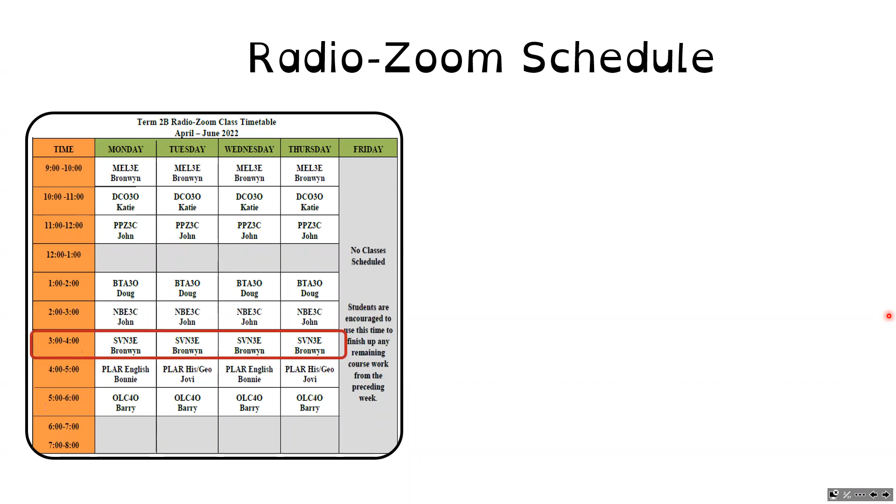Our classes are scheduled Monday through Thursday from 3 till 4 in the afternoon, and we are now in our 7th week of our 9-week course. At this point, you should definitely be submitting work if you haven't already, as we only have 3 more weeks left of our class, and then everything needs to be done before that so you can do your culminating activity.

So the key questions are the ones listed at the end of each lesson. Please do all of them. Some are check your understanding questions, some are activities at the end of each chapter, and most are review questions at the end of each chapter. So look at that list and do the appropriate questions.

Please show all of your work, explaining all of your thoughts and your thinking. This way I can truly understand what it is that you understand. Also make sure that you are answering the question that is actually being asked, as opposed to just talking on the topic.

You can do it by hand or electronically. Feel free to write in your workbook if that works for you. I'm not attached - it is a small space, so I would be surprised if you have enough room, but if you're able to fit your ideas in there in a way that is full sentences that explain your thoughts completely and is clear, that is totally fine with me.

You can also type up your work electronically. Using Word or Google Doc files are the ones that are easiest for me to open, so if you use those, that would be great. Everyone has access to Google Docs through their NNEC email address, so I can support you to get access to that if you need it. If you are going to use a different program, I'm sure that it's fine - just touch base with me so that I can make sure I can open your files. We can do a trial version or something.

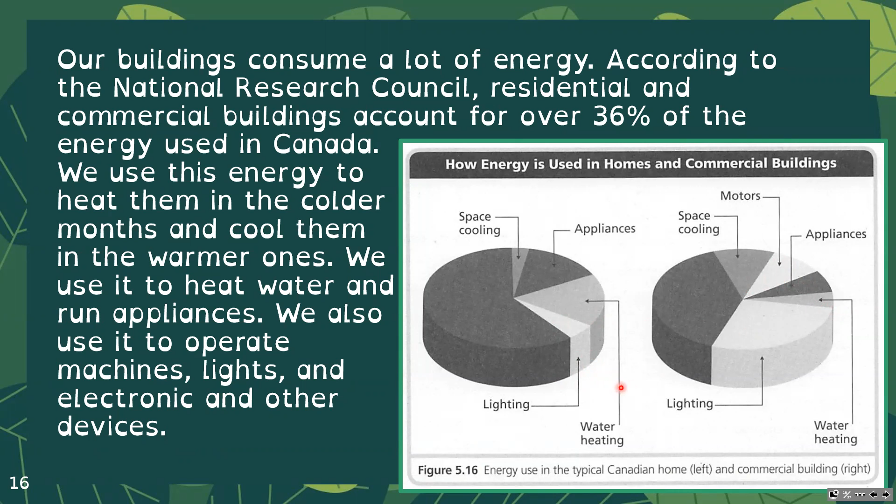The greatest need for energy in residential buildings is for space heating and cooling. On average, about 63% of the energy used in a typical Canadian home goes towards space heating and cooling, and another 18% goes for water heating. In commercial buildings, almost 50% is used for space heating and cooling, and some 36% on average is used for lighting.

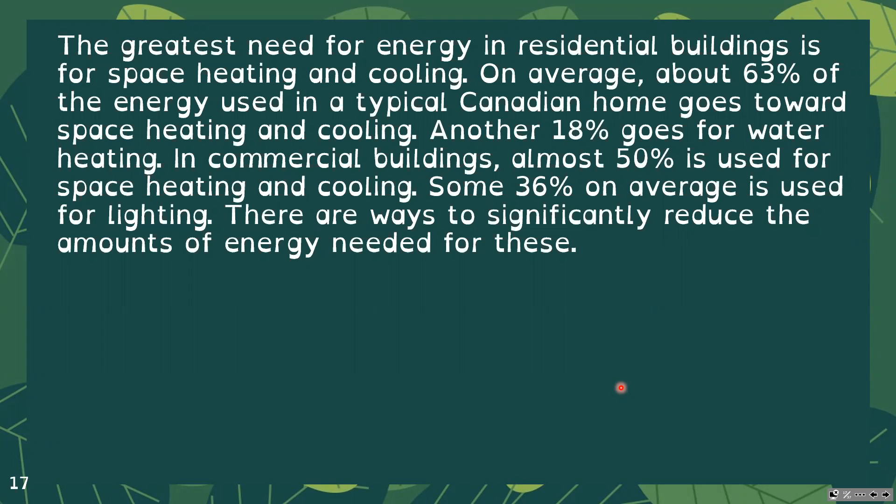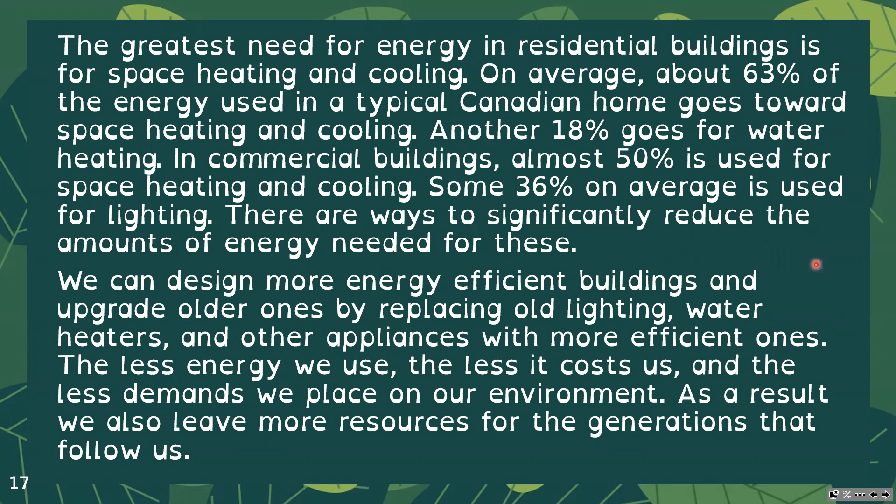There are ways to significantly reduce the energy needed for these. We can design more energy efficient buildings and upgrade older ones by replacing old lighting, water heaters, and other appliances with more energy efficient ones. The less energy we use, the less it costs us, and the less demand we place on our environment. As a result, we also leave more resources for future generations. Even if we're still using energy in these same ratios, doing it more efficiently overall means we're saving more electricity or energy. So how can we design energy efficient buildings?

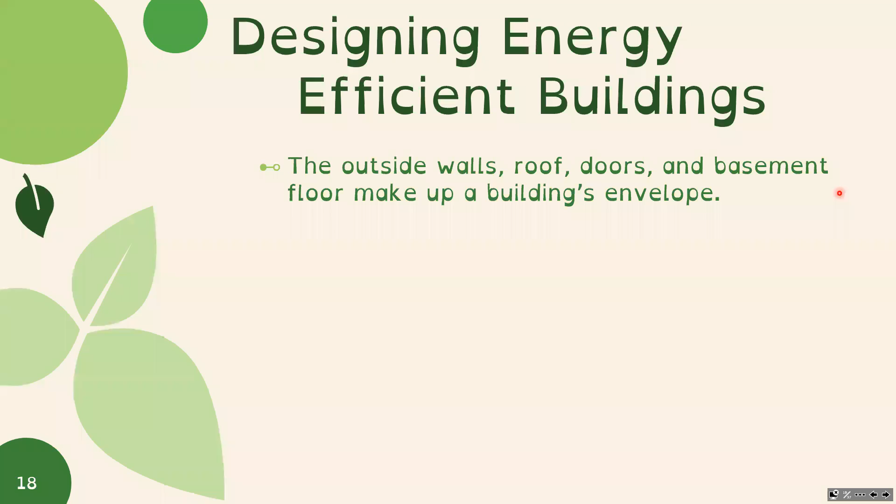The outside walls, roofs, doors, and basement floor make up a building's envelope. It's called this because this surface wraps around everything inside the building. The envelope keeps the building's contents, including people, protected from the weather. It also forms a barrier against heat loss when the furnace is on, and heat gain in summer when the air conditioning is on. If this barrier fails, the energy loss through its parts can be large.

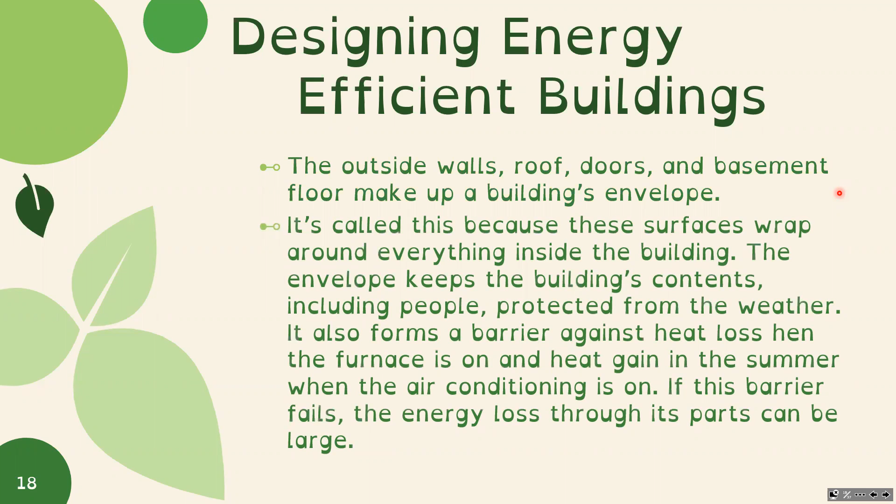This envelope is really, really important. I've definitely lived in homes where it wasn't super sealed, and you could feel the cold air coming in through doors or around windows. That had a really big impact on the well-being of my household, just because the envelope wasn't sealed and wasn't really strong.

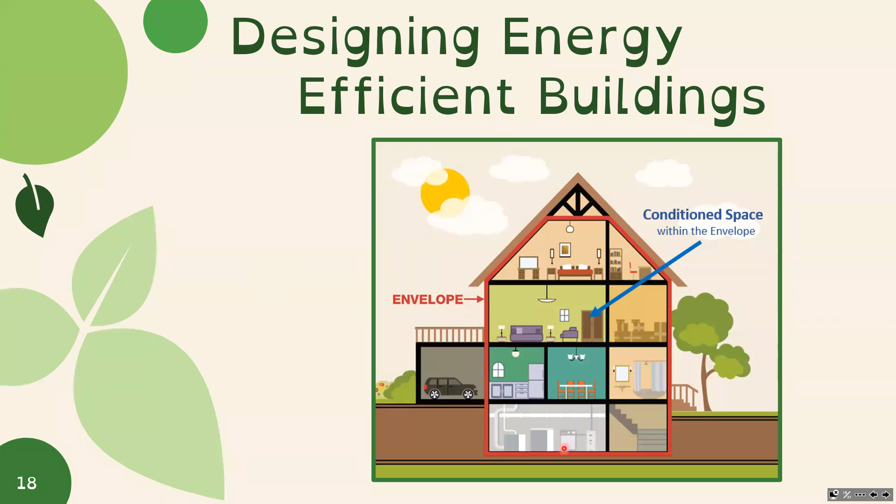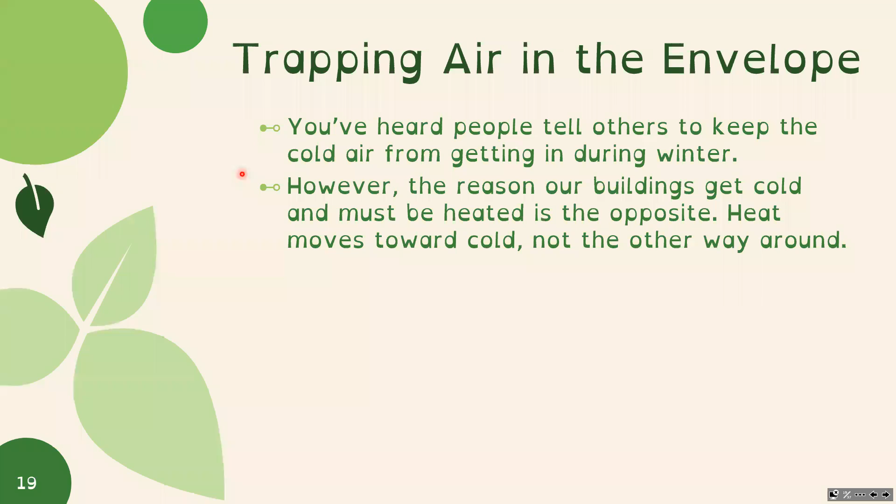So how do we trap air in the envelope? You've heard people tell others to keep the cold air from getting in during winter—maybe you've heard someone standing at the door saying, 'hey, you're letting the cold air in.' But really, the reason our buildings get cold and must be heated is the opposite. Heat moves towards cold, not the other way around. So really what's happening is you're letting the heat out. If you're standing in winter with the door open, you're letting the heat out as opposed to letting the cold in.

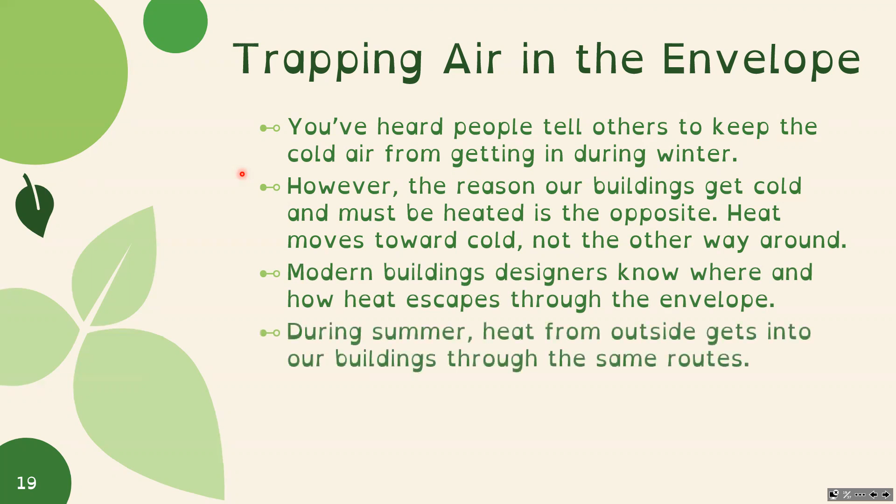Modern building designers know where and how heat escapes through the envelope. During summer, heat from outside gets into our buildings through the same routes.

25% goes up through the roof if it's not insulated well. Houses that have no snow on them in winter because it's all melted off means a lot of heat is escaping through the roof, melting the snow and letting it fall off. You don't want a lot of snow on your roof, that's not safe, but having it all come off naturally means a lot of heat is escaping through your roof.

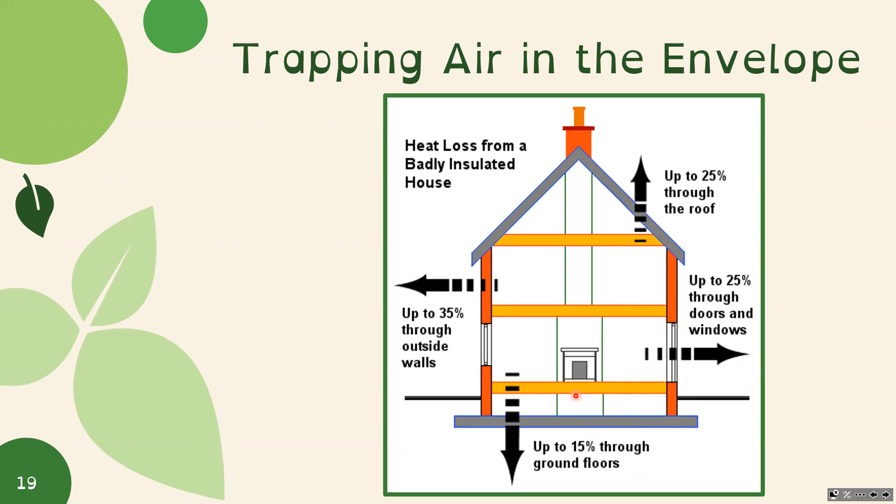35% escapes through your exterior walls, 25% through doors and windows, so how well those are sealed can really release a lot of heat. And up to 15% through the ground floor, where heat going into the ground is another way we lose heat from our envelope.

Today's building designs call for tightly sealed envelopes that trap lots of air. Trapped air slows heat movement. The more air trapped, the longer it takes for heat to move through the envelope, outside in winter and inside in summer. Because heat movement takes longer, much of the energy that would otherwise be used on heating and cooling is saved.

To trap air, workers seal the outside of the envelope against drafts. They do this using caulking and foam around wood and masonry joints, windows, and doors, and also around electrical, plumbing, and other utility services that go through the envelope.

They then fill envelope cavities in the roof and walls with insulation. The insulation contains lots of air pockets that trap air. More insulation means more trapped air and greater energy savings.

They cover the inside of the envelope with a polyethylene vapor barrier, which prevents moisture from inside the house from getting into the envelope. Then they cover the vapor barrier with an inside wall surface like drywall.

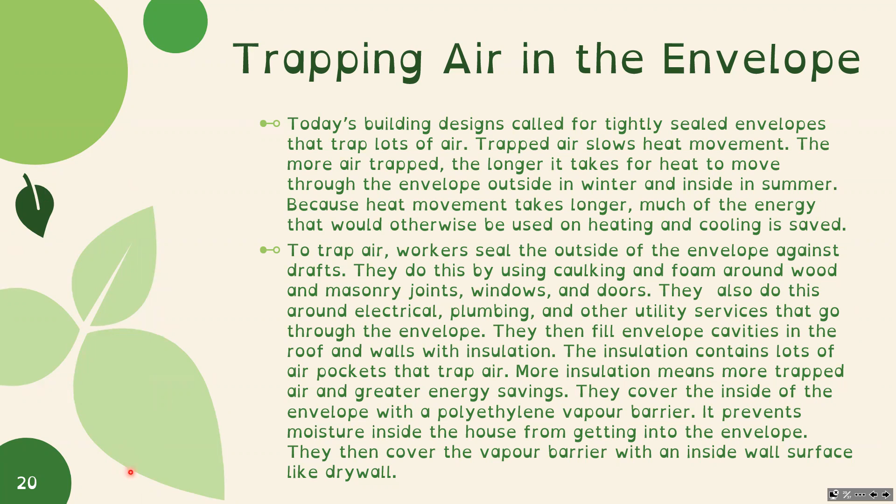So you have a sandwich where you have your outer wall, your insulation, your vapor barrier, which keeps moisture from getting your insulation moldy, and then your drywall or whatever siding is used inside your house walls.

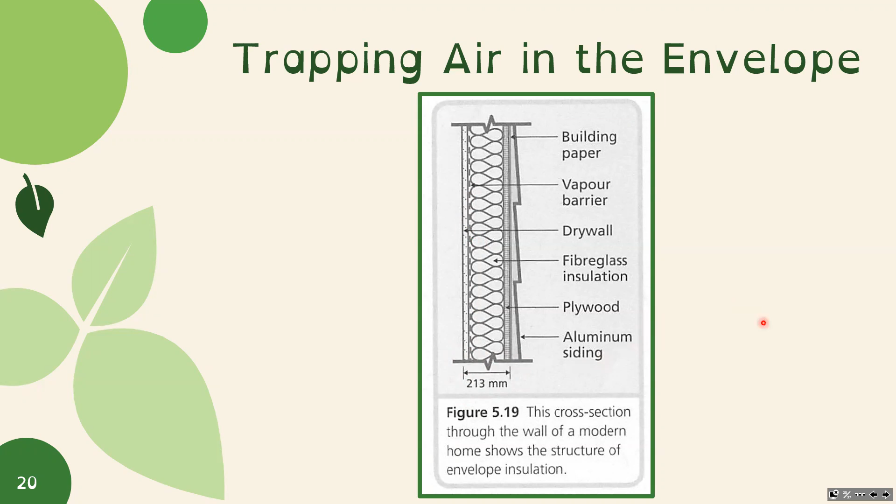In the basement, rigid insulation is placed on the surface over which the concrete is poured. Basement walls are typically also insulated with rigid insulation fixed to their outside surfaces. Rigid insulation kind of looks like styrofoam, it's hard like styrofoam, and it's put into the floor. Then concrete being poured over it means there's less heat being lost to the earth.

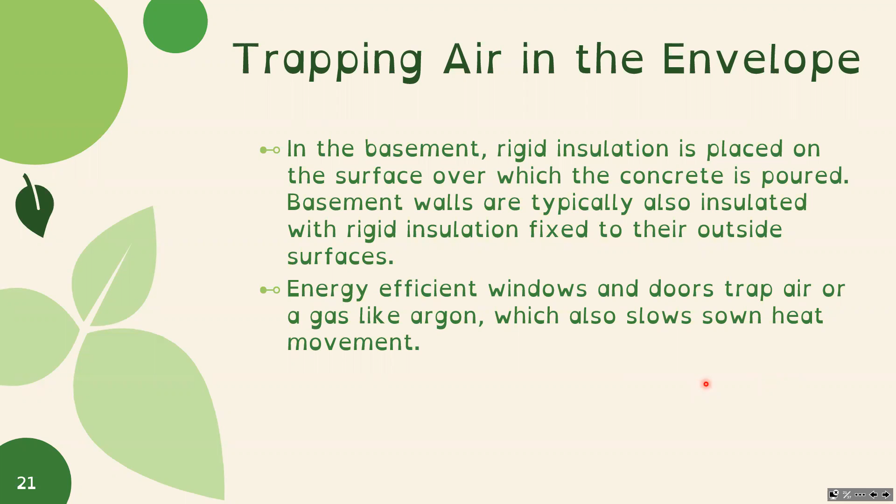Then we have energy efficient windows and doors, which trap air or gas like argon, which also slows down heat movement, meaning there's less heat being released through windows and doors.

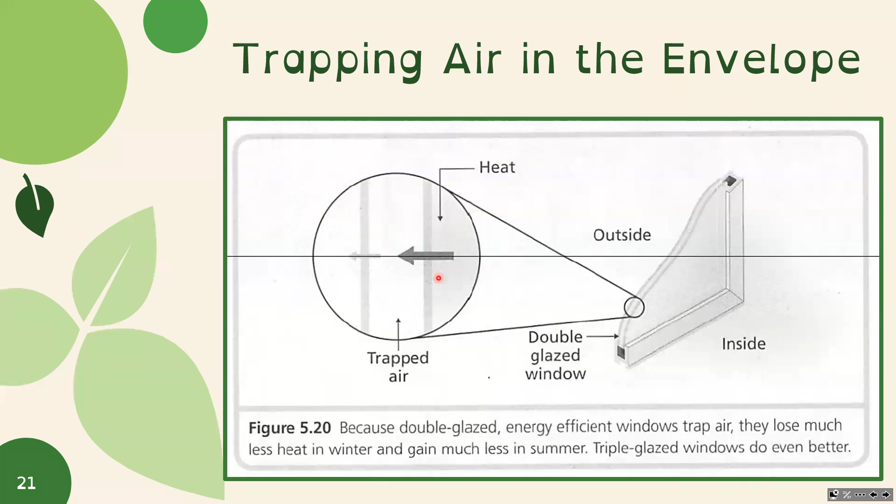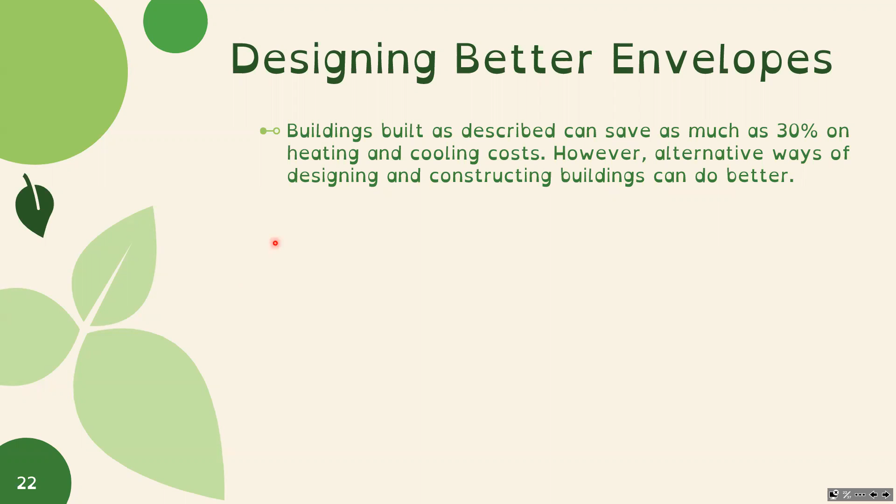So how can we design better envelopes? Buildings built as described can save as much as 30% on heating and cooling costs. However, alternative ways of designing and constructing buildings can do better. All those sealing methods we've talked about are good - proper insulation, a thick barrier, making sure your ceiling, roof, and floor are insulated - but there are other ways we can do even better.

One example is straw bale buildings, built using dry straw bales. The bales replace much of the insulation and framing used in conventional buildings. The fire-resistant bales have no food value to attract pests. Workers stack them to construct walls, then stucco their outside surfaces and plaster them inside.

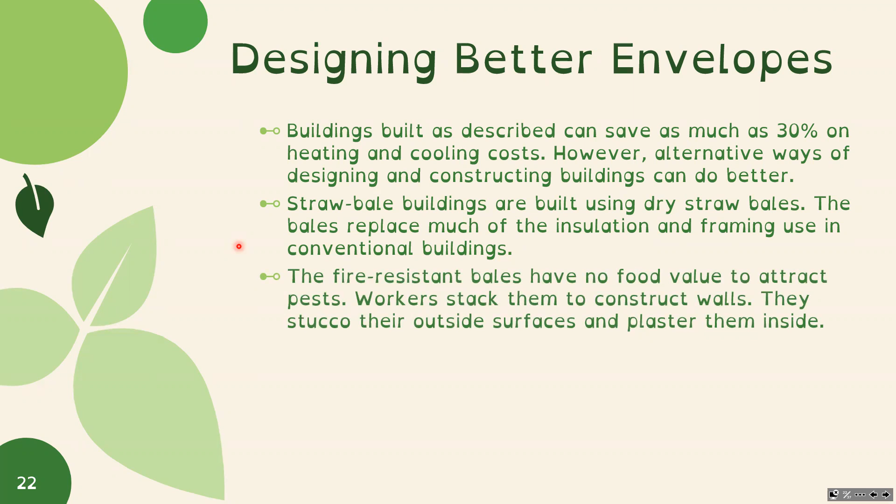This procedure protects the bales from moisture and trap air. The walls for such buildings are thicker than standard, ranging from 450 millimeters to 580 millimeters based on the width of the straw alone.

Remember that 213 millimeters was the thickness of the last wall we discussed, which is the current standard wall. So this straw wall is almost 2 to 3 times the thickness of a regular wall.

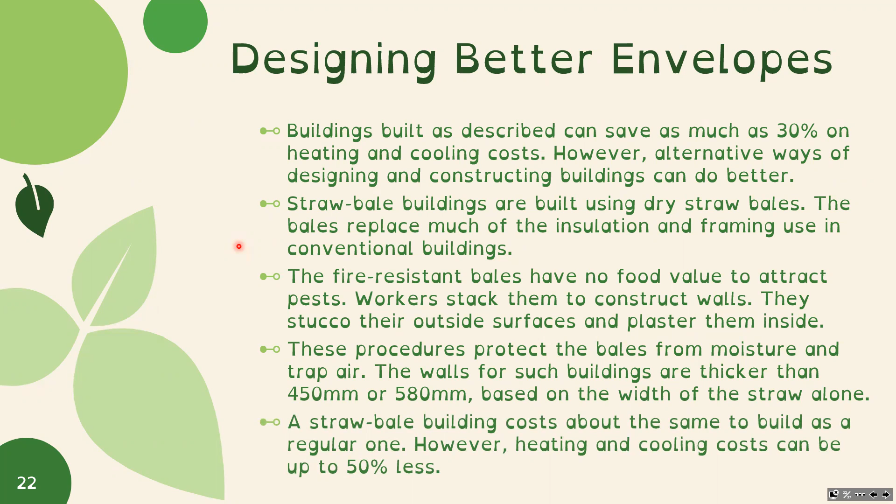The straw bale building costs about the same to build as a regular one. However, heating and cooling costs can be up to 50% less, so that's saving a lot.

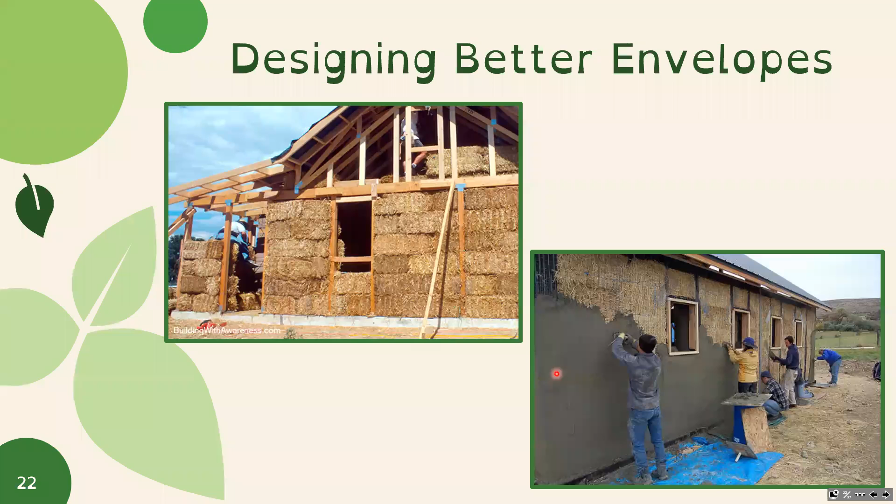So that's designing more efficient buildings. But what else can we do? We can use energy efficient appliances, motors, and water heaters in our buildings. Remember that appliances and water heaters are fairly significant in how we use energy in our homes, and they're less used in commercial buildings, but motors are significantly used in commercial buildings. So this is all useful for both our homes and our buildings.

Overall, today's commercial and residential appliances, motors, and water heaters use far less energy than before. Modern refrigerators and air conditioners use up to 50% less energy than those made 20 years ago. Appliances for both residential and commercial uses, such as ovens, dishwashers, ice machines, fryers, and griddles, may be Energy Star rated, meaning they use less energy.

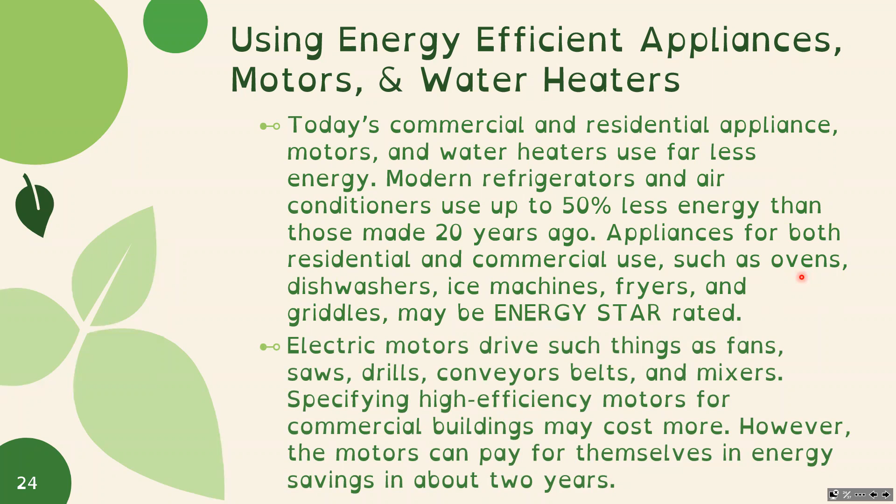Electric motors drive things such as fans, saws, drills, conveyor belts, and mixers - specifying high efficiency motors in commercial buildings may cost more. However, the motor can pay for itself in energy savings in about 2 years, and then you're just saving.

Homes use a lot of energy for water heating. Designing homes to use tankless hot water heaters can reduce the amount by up to 75% for small households. Tankless hot water heaters also typically last twice as long as standard tanks and take up less space.

Another option is solar hot water systems. In Ontario, these systems can save up to 60% on water heating costs. Although many times more expensive than conventional water heating systems, they last longer. They also pay for themselves in energy savings in about 7 years. After that, the hot water they supply is essentially free.

So many of these things we've talked about in the past and are talking about today are a big investment up front. They cost a lot up front, and so that feels like a big hit. But over time, they save you money, paying off the amount you invested at the beginning, and then you end up saving money you don't have to reinvest later on.

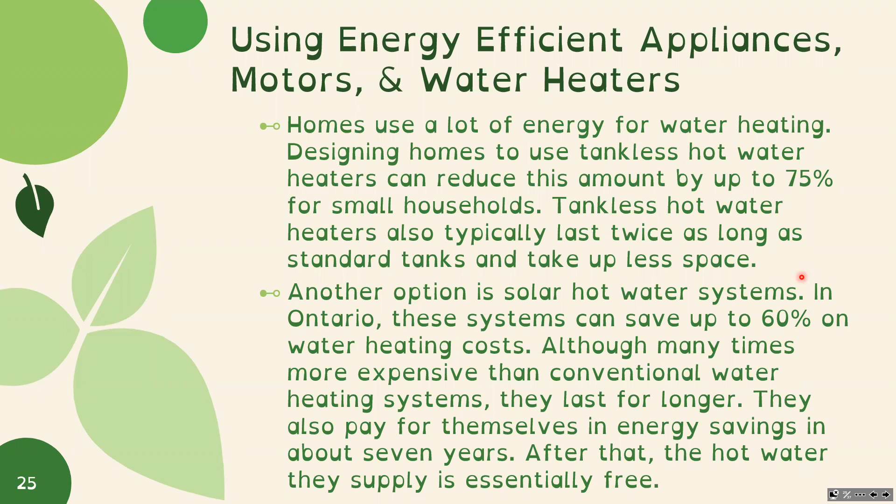So it's something to remember - these things do seem really expensive at the beginning, definitely, but they end up costing you less in the long run. It's about the long game as opposed to just the short game.

So we can talk about R2000 homes. A Canadian program, R2000, is designed to create energy efficient, environmentally responsible homes. Launched in 1981, R2000 has since been adopted around the world. Homes built to R2000 standards typically use 30% less energy overall than homes built to other building code standards.

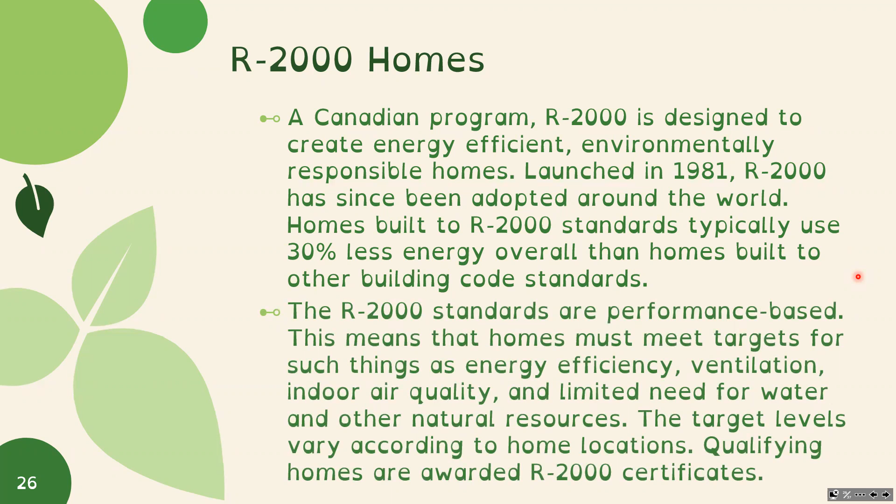The R2000 standards are performance-based. This means that homes must meet targets for such things as energy efficiency, ventilation, indoor air quality, and limited need for water and other natural resources. The target levels vary according to home location. Qualifying homes are awarded R2000 certificates.

So here you can see that if we're comparing an R2000 home and a conventional home, yes, an R2000 home costs a little bit more than a conventional home. But the benefits - increased resale value, increased comfort, healthier indoor air, and energy savings - mean you get so many benefits from an R2000 home, even though it does cost a bit more financially than a conventional home.

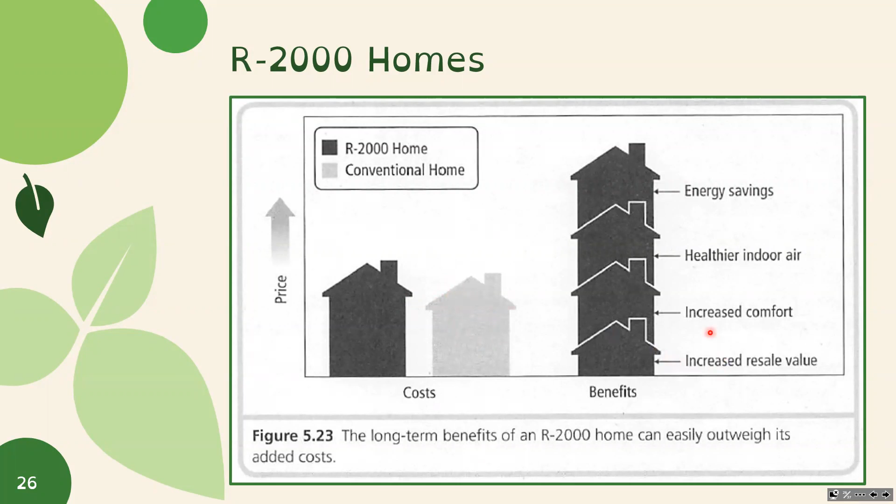But if you think about it in terms of a conventional home, it saves you money upfront, but it costs you all of these other things, which has an impact in the long run.

And then we have smart homes. Smart homes connect devices that work on electricity in a network. Smart home owners can program and control this network via a control panel, computer, or remote device. Separate programs can be set for lighting, heating, air conditioning, home theater, and security systems. Although smart homes can be costly, they can also yield significant energy savings.

For example, in combination with motion sensors, lights can be set to turn on when people enter a room and turn off when they leave. Heating and air conditioning can be set to turn down at night or when people are away, and to turn up just before they wake or return. Refrigerators and water heaters can be programmed to work with maximum efficiency.

So your house being smart and doing some of the work for you means people can't be like, oh, I just keep forgetting to turn the lights off. Programming your house to do some of those things can really end up saving you energy in the long run, which helps financially.

And we have zero energy buildings. So-called zero energy buildings or net zero energy homes are designed to sustainably produce as much energy in a year as they consume. That's why they're called zero energy, because they have to take energy - we rely on energy, but they also produce energy, which means they aren't taking external energy.

So they couple energy savings techniques like those used in R2000 homes with alternative energy sources. The alternate energy may come from solar, passive and active, wind, geothermal, biofuel, and small-scale hydro installations. One or more sources may be used.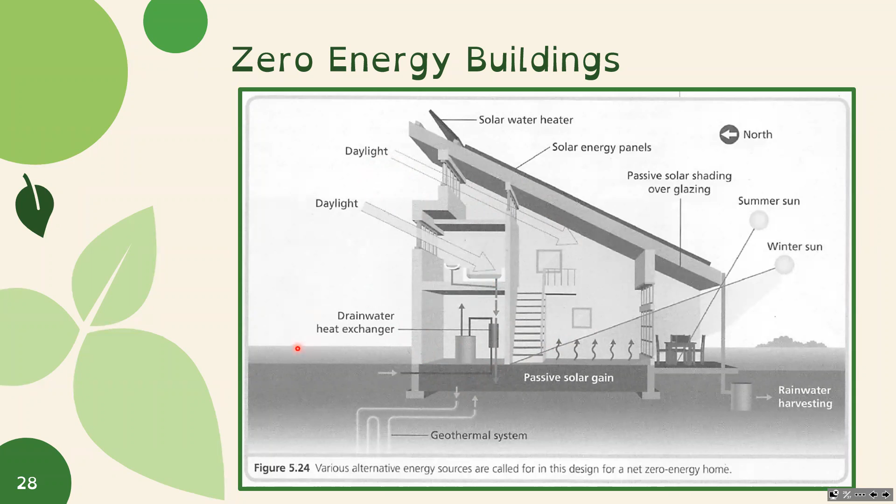And now we're going to talk about retrofitting older buildings, which has been more my experience, as I'm not buying a new building, I'm not creating a new building - I'm trying to figure out how to deal with an old one.

So old buildings were usually built when energy was cheap. By today's standards, they are usually big energy wasters. However, they can be upgraded to make them more energy efficient. Upgrading services, energy efficiency, fixtures, and other features of older buildings is called retrofitting.

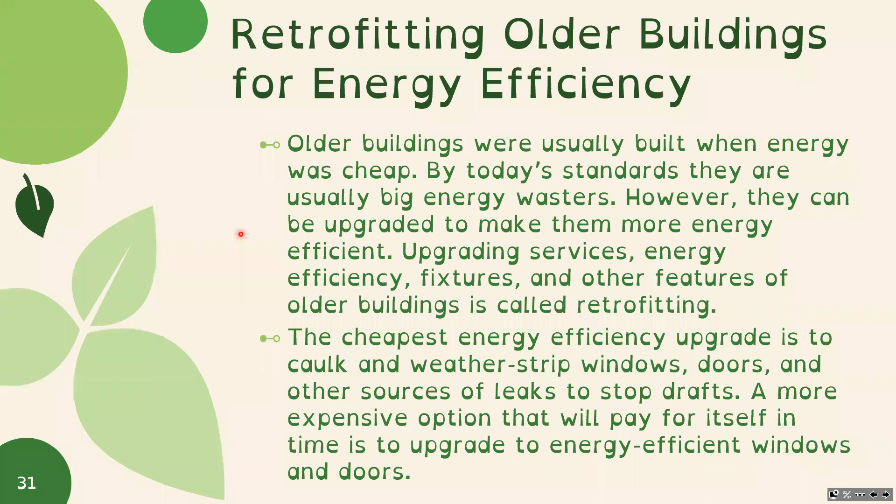The cheapest energy efficiency upgrade is to caulk and weather strip your windows, doors, and other sources of leaks to stop drafts - sealing up that envelope to help keep it strong. A more expensive option that will pay for itself in time is to upgrade to energy efficient windows and doors - though it costs more, you will save more in the long run. Again, this is an upfront investment for the long run.

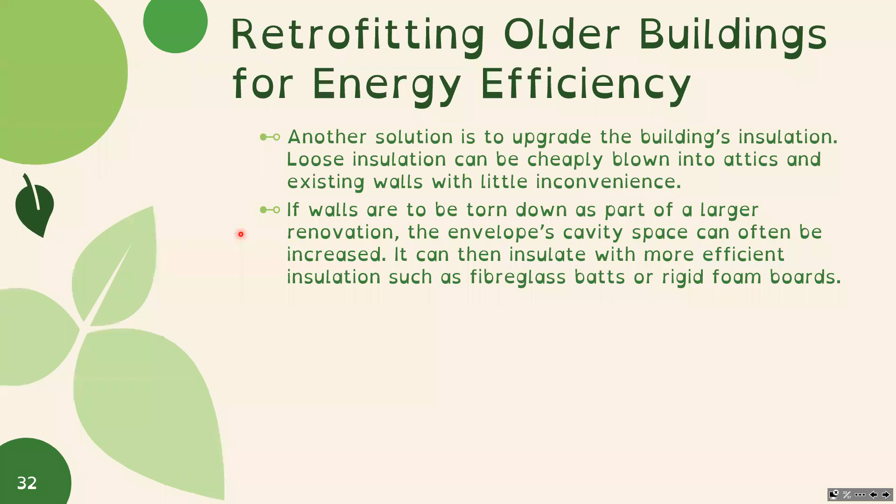Another solution is to upgrade the building's insulation. Loose insulation can be cheaply blown into attics and existing walls with little inconvenience. If the walls are to be torn down as part of a larger renovation, the envelope's cavity space can often be increased, and insulated with more efficient insulation such as fiberglass batts or rigid foam boards. So if you're going to renovate the whole thing, keep that in mind in terms of how you can improve your insulation as you go.

Basement walls can be framed on the inside and insulated and finished. This requires digging up the foundation walls.

Still, a third option is to have expandable spray foam blown in above the sill plate inside the basement, and also between the joists or rafters of the attic and on the basement walls. The foam dries into a dense sheet that traps lots of air. Although expensive, this method is often best for old buildings because it fills up every crevice and provides superior insulation.

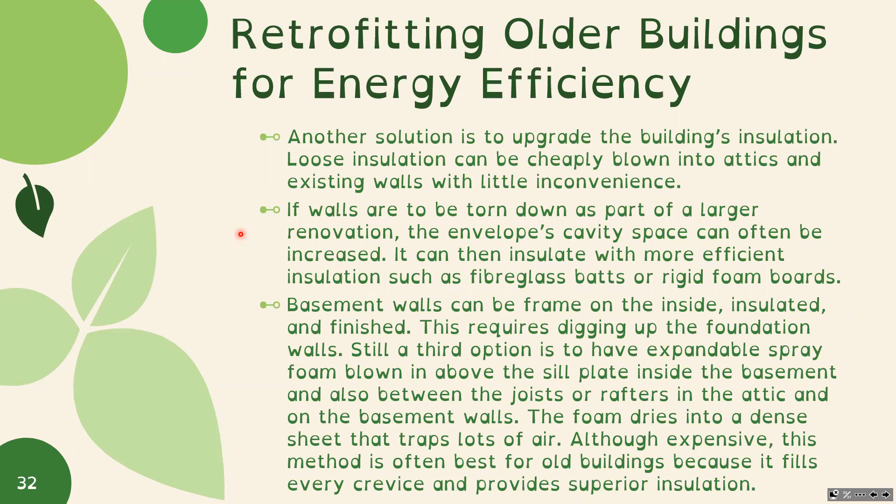Upgrading to fluorescent or LED lamps can save 75% or more on lighting costs, as we've talked about before. Upgrading to high efficiency furnaces and appliances will also yield big savings, as will converting to tankless hot water systems. All of these things help with savings in the long run, but are generally a large investment at the beginning.

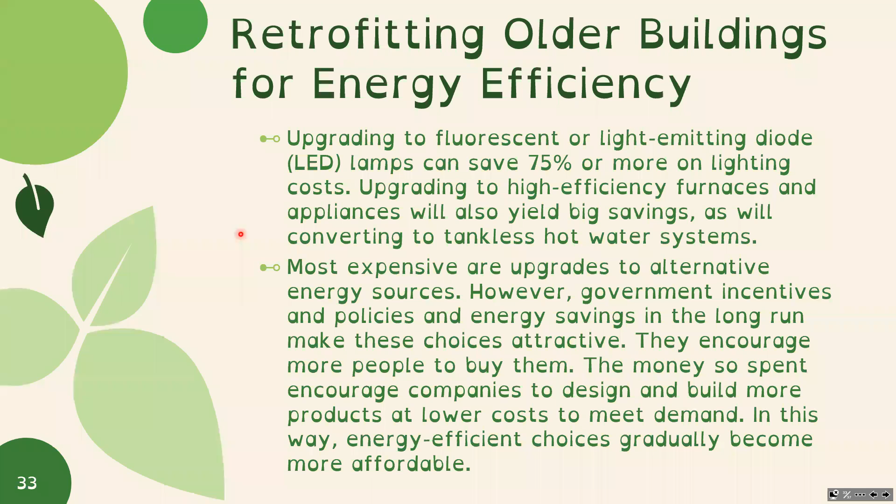Then you have the most expensive upgrades, which are the alternative energy sources. But there are government incentives and policies, and energy savings in the long run, that make these choices attractive. They encourage more people to buy them. That's the point of the government incentives, so the money is to encourage companies to design and build more products at lower cost to meet demand. In this way, energy efficient choices gradually become more affordable and more accessible to a wider population of people.

All right, that is our lesson for today. So that's lesson number 18, making buildings energy efficient. We talked about designing energy efficient buildings, trapping air in the envelope, and designing better envelopes. We talked about energy efficient appliances, motors, and heaters, which all contribute to R2000, smart homes, or zero energy buildings. And we talked about retrofitting older buildings for energy efficiency, including windows, lights, appliances, insulation, and alternative energy solutions with government incentives.

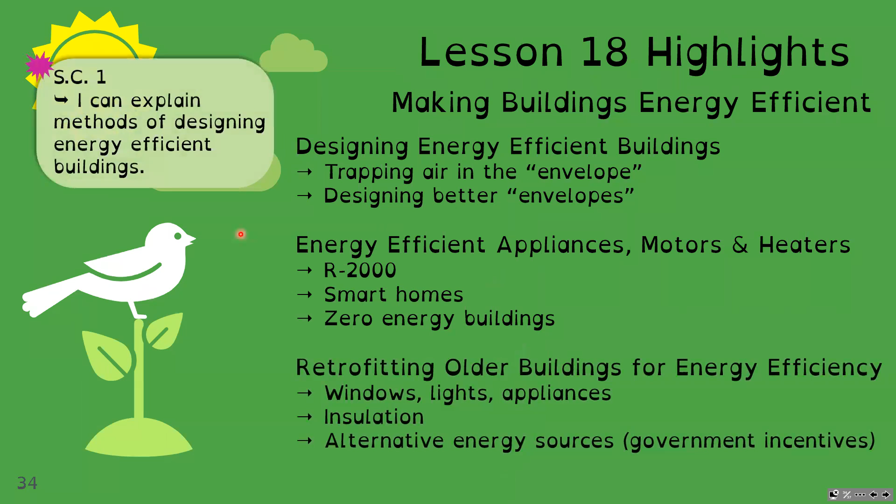So hopefully now you can explain methods of designing energy efficient buildings, explain how to make older buildings energy efficient, and know the different appliances, motors, and heaters that save energy. For this lesson, you have an activity to do, activity 5.3 on page 152.

This is looking at the energy consumption in your home. It's a bit of a mini lab. The purpose is to determine the energy consumption of a home by reading and interpreting electrical meter readings and calculating the cost of the energy. You should have a hydro or electrical meter on the exterior of your house. The cost of electrical energy is based on price per kilowatt hour, which we talked about before.

The electrical energy usage is measured using a meter attached to the wiring of a house or building. If you have an older meter in Ontario, there is a set rate for each kilowatt hour. If you have a new or smart meter, the price per kilowatt hour depends on the time of day you use the electrical energy, which is what everything has been converted to these days. Remember, your book is old.

Each month, your home's electrical bill is based on the meter reading of the amount of electrical energy in kilowatt hours used in the previous month, multiplied by the cost of a kilowatt hour. The cost of kilowatt hours in Ontario varies from about 4 cents to about 9 cents. For this activity, assume your kilowatt hours cost about 7 cents. I don't know what that is currently, I forgot to look it up to see what the current price is, but still just use 7 cents, that is fine. So, your procedure.